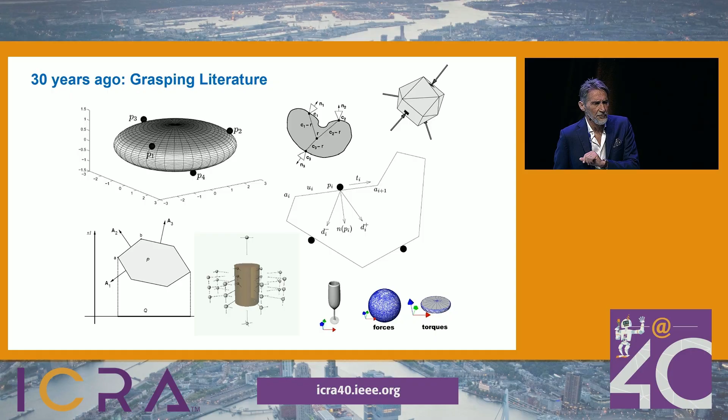At that time we started inquiring into some theoretical underpinnings of grasping, and we clarified a few things. For instance, let me go through some details. What is form closure? Form closure is the property of blocking an object by virtue of contacts.

Imagine the black dots as fingers. This object is not form closure. This is partial form closure, meaning there are motions that are allowed. If you do an analysis, this is basically a linear program that you can solve, and you find that the set of motions allowed by a given set of contacts is a cone, and you can give a nice geometrical description of that cone.

A next step was force closure. What is force closure? It's when a hand and an object are such that the hand can resist all external disturbances. So if I squeeze this, I can squeeze as far as I want, but I can prevent any motion of the object—that would be force closure.

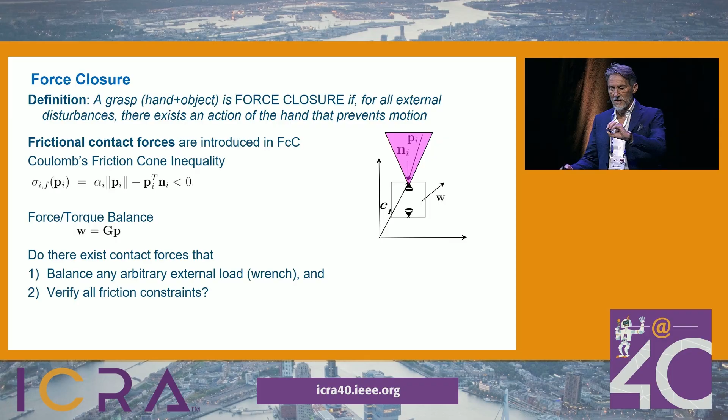Of course it takes friction, a model of friction. It takes a balance equation for the wrench exerted by the external world on the hand, and you have to verify all friction constraints by squeezing more to avoid slippage, something we do very often with hands. The question here was: what squeezing forces can a hand really apply?

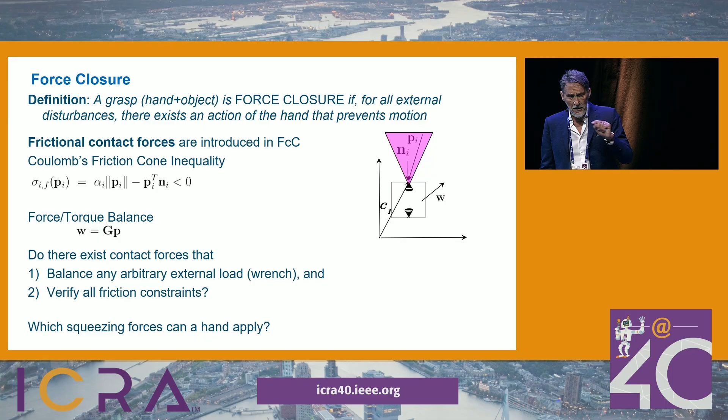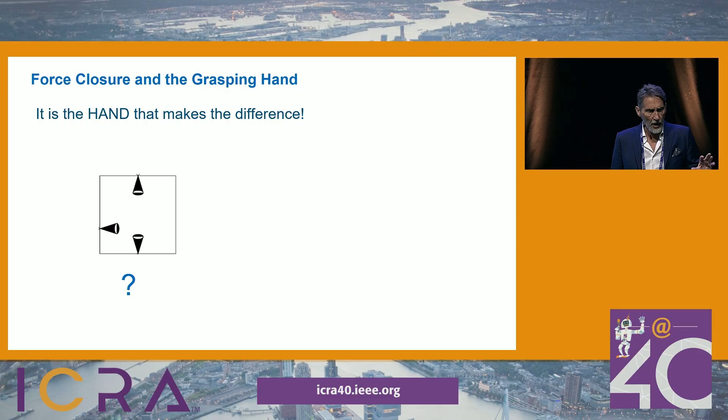Because hands are an integral part of grasping—that was not so clear at that time. We realized it was the hand that made the difference. So for instance, this object, you only have contacts. Is it force closure or not? Can it be squeezed so as to avoid any motion or not? The answer is unclear unless you have the hand.

So this hand can really squeeze the object and prevent any motion because of friction. This hand could not, because there is no degree of freedom of the hand that could squeeze the object.

So, okay, this is the observation. The analysis of this was: well, the problem is ill-posed if you only do equations of balance—static balance between the external forces, the internal forces, and the torques at the joints. So this is ill-posed for whole hand manipulation, and it was realized that you really need a soft body, a model of softness in the body to understand the physics.

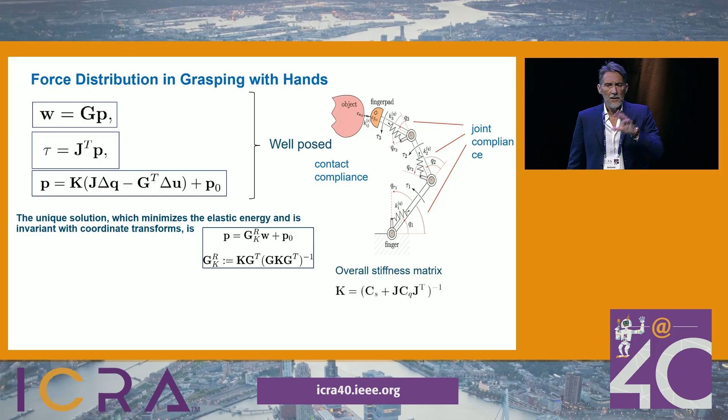And that is now a solution. So you can find how the forces distribute, and how they can be modified, and decide whether this can be done or not. So now, the problem still remains: what are hands good at? How far are we from human hands? Very, very far. Very, very far.

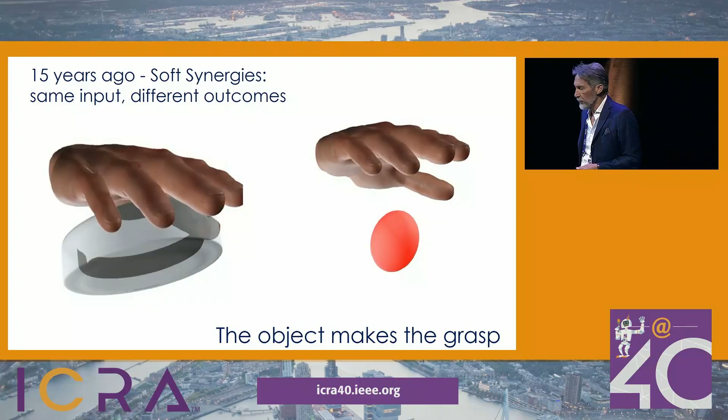So 15 years after doing that kind of work, I started reconsidering, with some frustration for not being able to go much beyond theory. We started looking back and saying, okay, but I would really like to do something. We came up with this idea of soft synergies—the idea of a geometric template, a primitive of motion that are the synergies that attract the hand, while the physics of the interaction with the environment repels the hand and decides on the final shape of the hand, so that the same primitive can lead to very different endpoint results.

By the way, the analysis of this was only possible because we understood that this is a whole body, a whole hand problem, and we understood that because 15 years before we had those equations. There are other interpretations that are very nice in neuroscience, in motor control. Anatole Feldman calls these equations equilibrium point.

The practical conclusion is that the environment manipulates our hands. The shape of the hand is dictated by the environment, and kids know well how to use this. So if you look at this girl—that's not an ordinary girl, that's Tamim's daughter, so probably smarter than average—she managed, with this very simple hand, to pick up a coin off a table. The hand was deformed on the table to pick up the object.

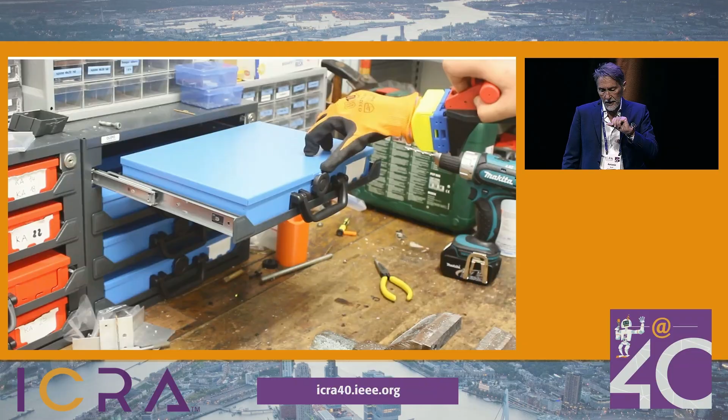And here is another demo of Manuel Catalano using the hand to do things that the hand could not do if it was not used in the environment to prepare its shape to do things.

So the question is, can a robot do the same? Can we use the environment to manipulate our own hands and the environment finally?

There are two types of approaches that I will review quickly. Data-driven approaches, of course, do not require precise models of the object to grasp, but require large data sets.

So basically, it goes like this: you look at the boxes, you score the different grasps, you put the hand in the picture, which is fundamental, and then you have quality measures - some for the quality of the box, how close it is to the point cloud, some for the wrench quality, some for the alignment quality, some for collision avoidance - and in the end you have a neural net that computes the best grasp.

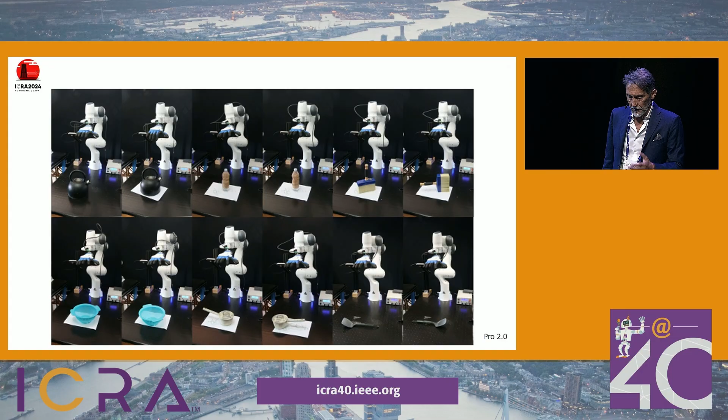Interestingly, with the hand we are using, we are able to do many, many grasps, and the results are good. It outperforms the state of the art.

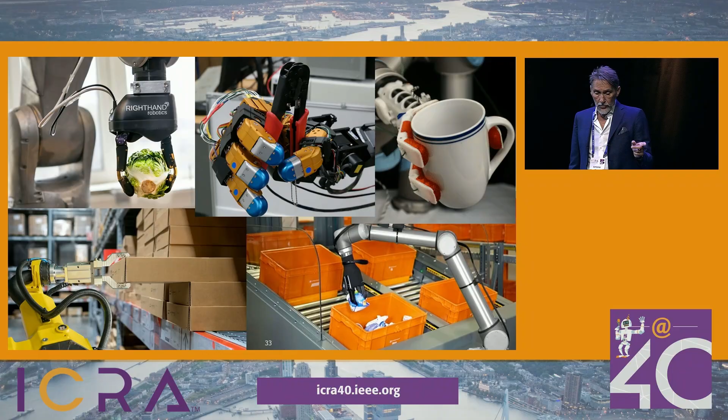Good news is it can also be used with other hands, for instance even with the Franka gripper hand, where we showed in this paper that this method outperforms DexNet or others pretty well.

There are harder tasks though, where I don't think pure learning is still good at. For instance, you want to take a box out of a shelf and put it somewhere, or take that brown box from that position and bring it to the desired green position, or take the last box, the black box, under the red bricks, and place it out there. So how do you do these things not with a fixed plan, but by finding the plan?

In this case, analytical approaches have some advantage. They do need a model or good data, but they offer guarantees on stability, and they have no corner cases. Once you have an analytical solution, you know where it works.

So there are advantages. Here is the task, for instance, of getting the book out. You are using basically the form closure cones that I discussed before to describe the space of free configurations. Then you search the space through RRT, basically.

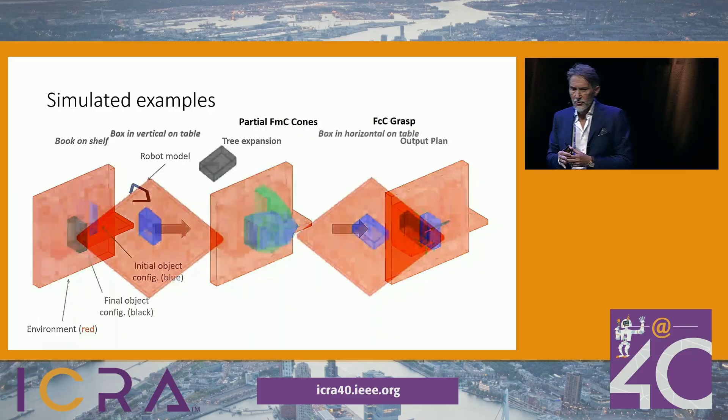And then you apply force closure analysis to determine how to take the box out, how to make it roll, how to avoid slippage, and eventually grasp it out. So here are a few experiments.

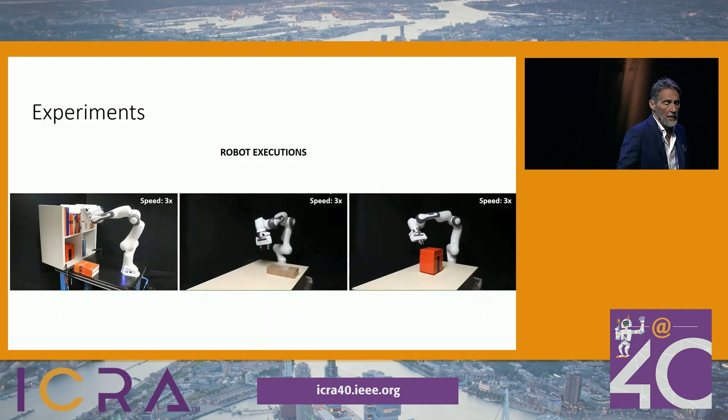None of this was pre-programmed. All of these behaviors are found by the algorithm itself, out of that search mechanism that I showed.

Of course, no plan is perfect. No execution is perfect, so you also need reflexes. Here is a very short snippet about reflexes.

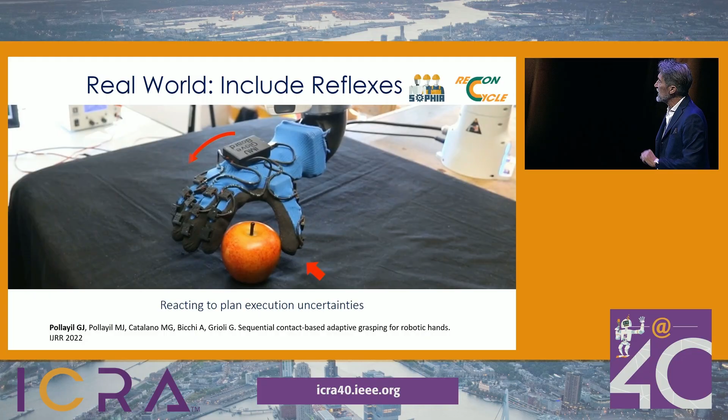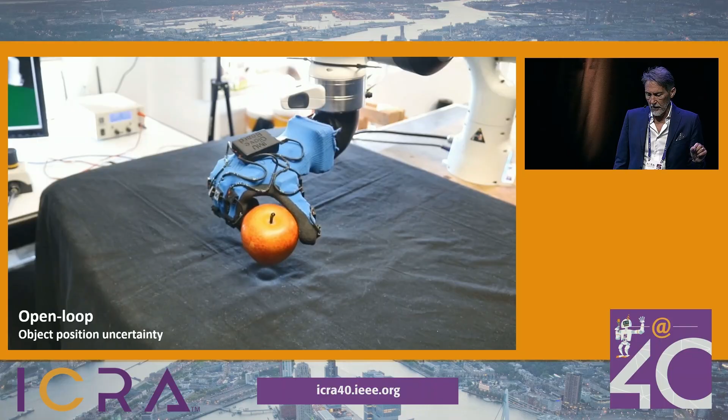So if you want to grasp even the simplest object - imagine this is the book from before - if the object is displaced a little bit with respect to your plan, even a little bit, even a forgiving hand like this one will not grasp. So then, we can repair.

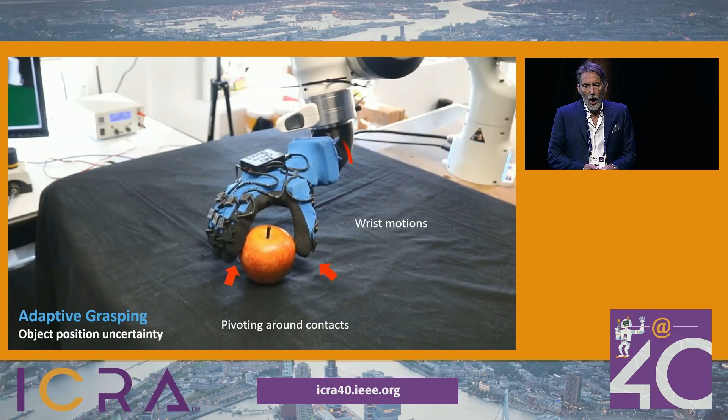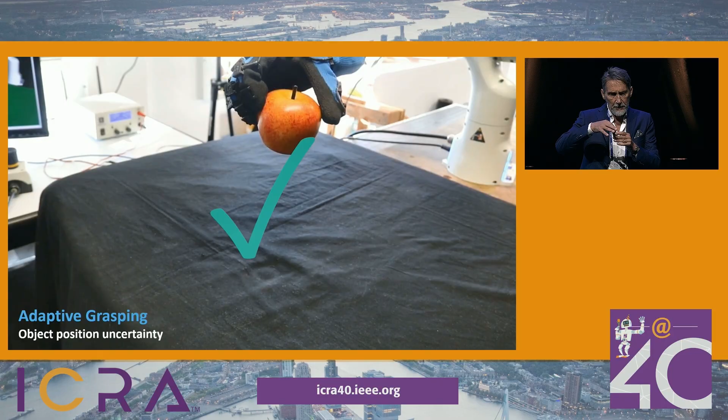This is the method we proposed recently, of having a grasp that stays as close as possible to the planned grasp, but pivots around the first contact until a second contact is reached, then pivots about the two, and then does this enveloping grasp.

I have no time to go into details, but this is just to tell you how important it is to add reflexes and sensing to the nominal plan that we've come up with.

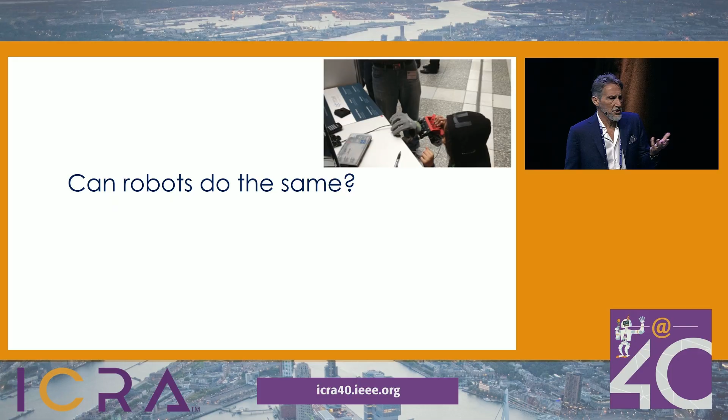So to conclude, can robots do the same as this girl? Can we just reason about picking a coin and taking it out by exploiting the environment and the constraints that the environment proposes? Not by far - we are not there yet. I think this is a large agenda.

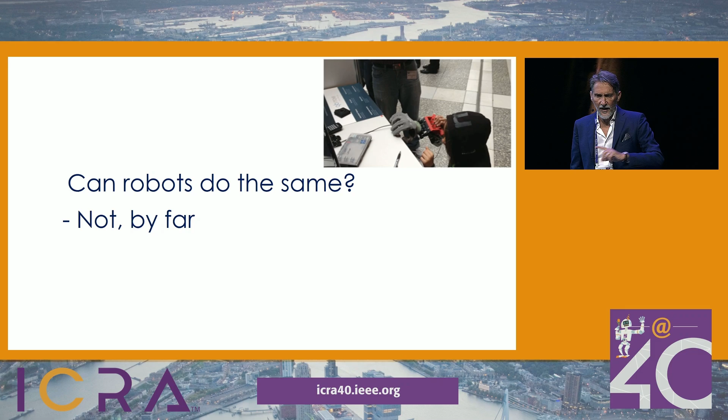I think in many things that Raja just said, I find myself on a much more practical or down-to-earth side, but I agree with what he said, and of course I agree with what Oliver said yesterday.

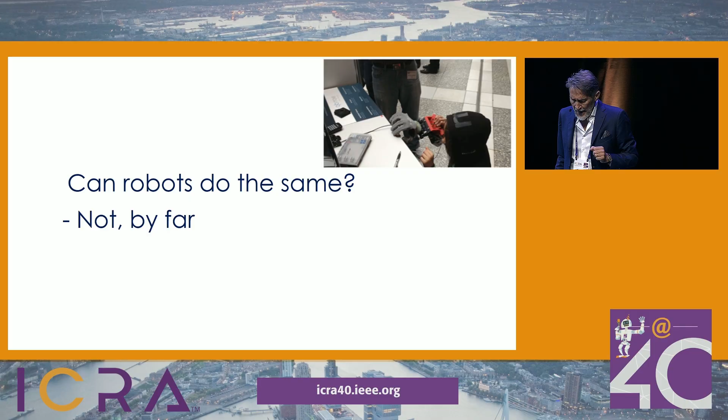But it is an interesting research program. The grasping problem is not solved, and indeed, a grasping problem is there, I think. So thank you very much for your attention.

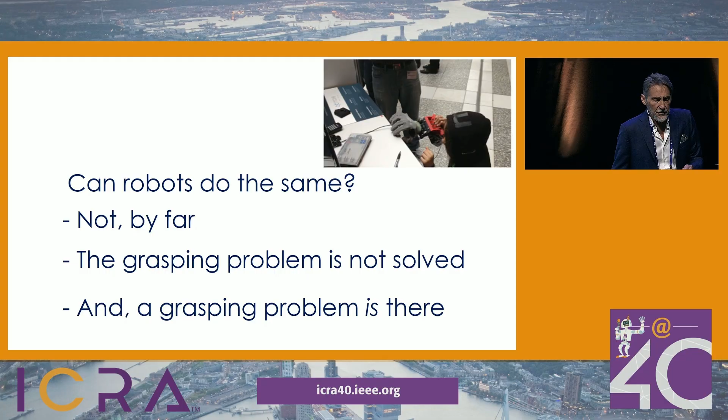Anyone? Okay, please. Hi, Professor Bicchi. Just to say, I read a lot of your papers when I was in grad school. Love them a lot. So quick question.

Most of the commercial robots I see have two fingers, grippers with two fingers. Just curious, what are your thoughts on robots for household tasks? How many fingers would you put?

Well, you asked me, of course I have a conflict of interest. I think the best hand is our hand, like everybody here. But it depends very much. I mean, anthropomorphism of the hand is not trivial, it's not to be taken for granted. You saw here that some of the methods we apply to hands and some we apply to grippers.

Eventually, I think grasping is the same problem. Once you have that, but you have to take the hand into consideration.

In service, I tend to think that a more anthropomorphic hand is useful, not just because it's better, but because the environment is designed for our hands. Handles are made for hands, right? And everything else in our houses is made for human hands. So it's very likely that the shape of the hand is best suited to grasp everyday daily activity objects.